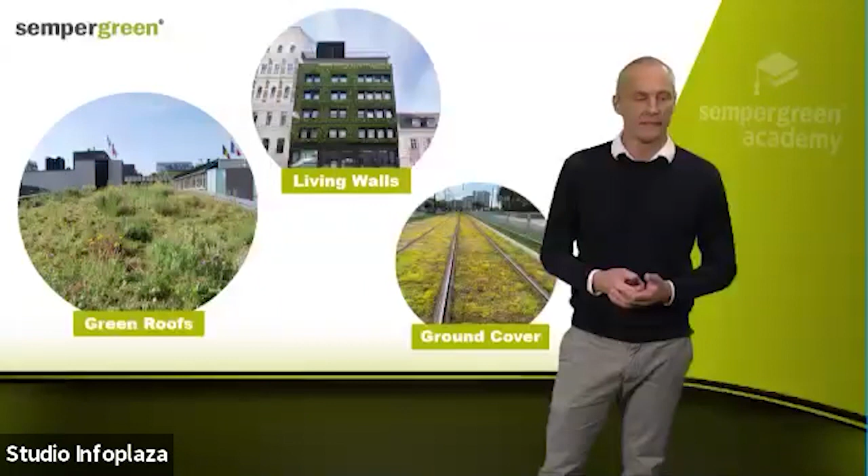It's our mission to create a greener and more livable world, and knowledge sharing plays a vital role in achieving that objective. The reason is that without information in the right place, we cannot move forward. So therefore, we've decided as a company to partner with experts to be able to share relevant content regarding green solutions and other topics through Sempergreen Academy.

One of these experts is Dr. Anna Zachrisson, and she is the Vice President of European Affairs for the Green Roof Diagnostics. She's a creative and award-winning scientist that translates difficult scientific information into understandable language, making the wonders of science available to everyone. It's her mission to inform and to communicate and to push projects forward based on solid data.

And this comes from a vision of a flourishing green industry that bases its claims on scientific data. In short, she is an independent consultant that always lets science have the last say.

But before we listen to what Anna and what science have to say about urban flood prevention, first, Roosmarijn Knol, who is a meteorologist at our host InfoPlaza, will tell us all we need to know about the causes of urban flooding. So sit back, relax and enjoy, and I give the floor to Roosmarijn.

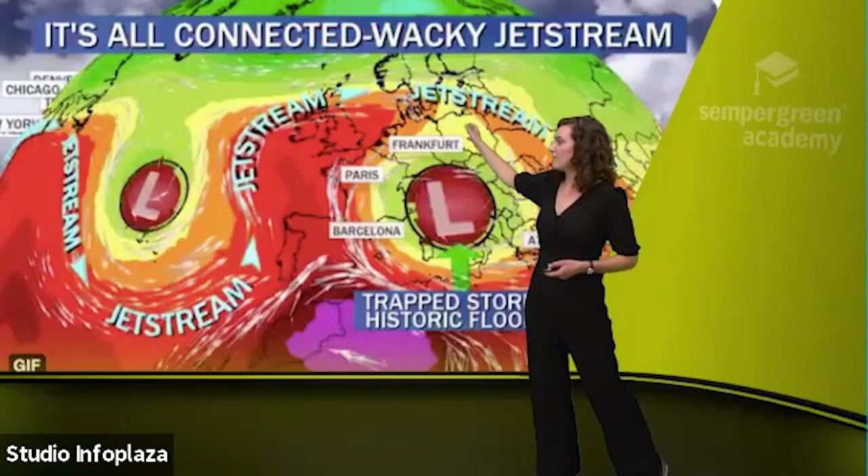Here we can see the jet stream. The jet stream is a meteorological phenomenon, and when the jet stream is a straight line, that means that the air and the wind at a higher altitude is flowing in a more or less straight conveyor belt from west to east. But when the jet stream becomes disrupted, as we can see over here, when it gets a wavy pattern, that means that weather systems can become trapped in between the curvature of the jet stream. And that is what happened over here.

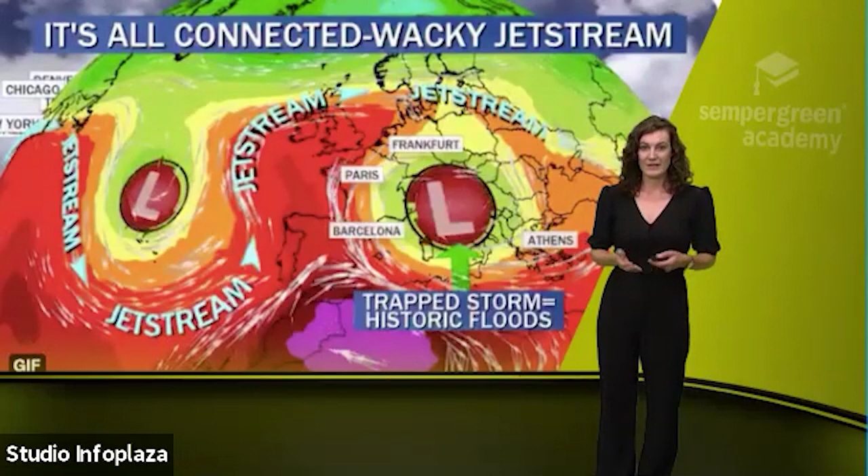We can see a low pressure system, a depression with showers and rain trapped in between the curvature of the jet stream. And that means that the showers remain at the same place for a long amount of time. And that means that those showers can produce extreme amounts of rainfall. And that was the case for the floods in Germany, Belgium, and the Netherlands.

So here I have a map of the rainfall amounts. It was spread over 2 days. We can see here the 13th of July and the 14th of July. And this map shows the colors and the rainfall that was measured during those days. So we can see the blue, purple, and red colors. So in one day, the maximum amount of precipitation was 150 millimeters.

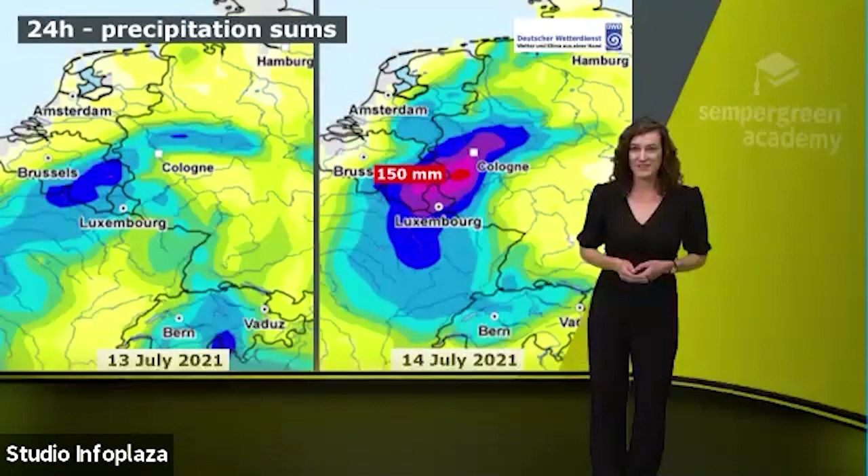But when we add those 2 days together, you can see that the total amount of precipitation in this area, a huge part, added up to almost 200 millimeters. So that is an extreme amount of precipitation, and our current infrastructure is not ready to deal with these amounts of precipitation, and that leads to severe flooding.

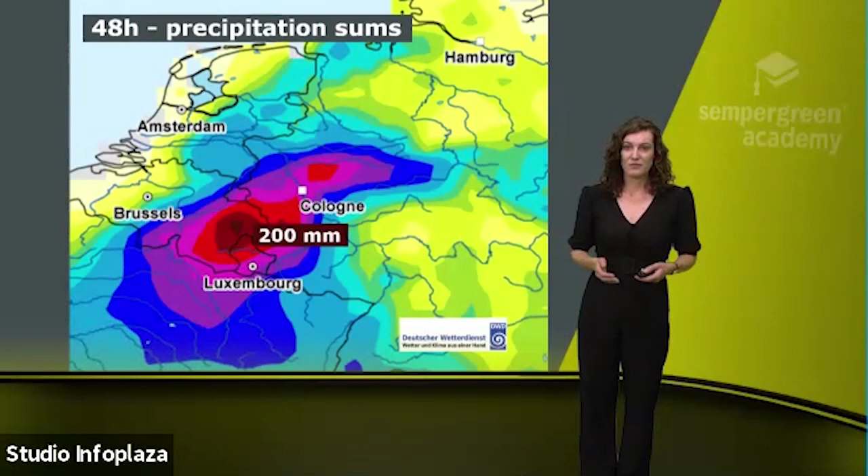So this was an event, a very rare event that happens once every 400 years. But science has shown that these types of extreme events are more likely to happen in the future. And in summer, it is up to 9 times more likely that such an event will occur. And as we saw in the previous slide, the extreme amount of precipitation, so almost 200 millimeters, can even increase with another 3 to 19%. So we should prepare ourselves for more of these extreme events.

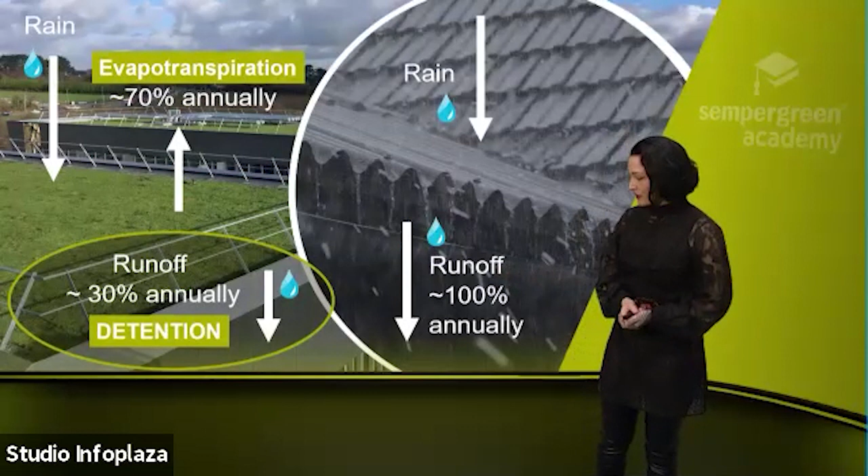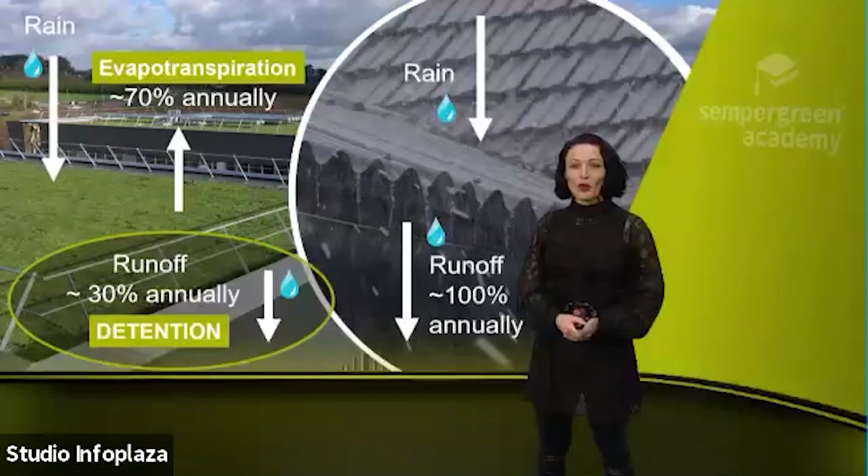So going up to the roof, when you have a bare roof, like you see here in this picture, approximately 100% of the precipitation will run off the roof annually and basically become runoff. And this, of course, if it's a big storm, it will fill up the sewers. It can lead to so-called combined sewer overflows. That basically is an overflow of the combined sewers that take in both the sewage that comes from your toilet mixed with any water that comes from rainfall, basically.

So these sewer systems are often underdimensioned in the Western world and can lead to an overflow. And in order for us to not have our toilets overflowing in our houses, there are so-called combined sewer overflow points, often located in the nearest water body. So now, as I sometimes say in Berlin, if it smells like poo when it's raining, it is poo, sadly. So this is something we would like to absolutely remove. This is not something we'd like.

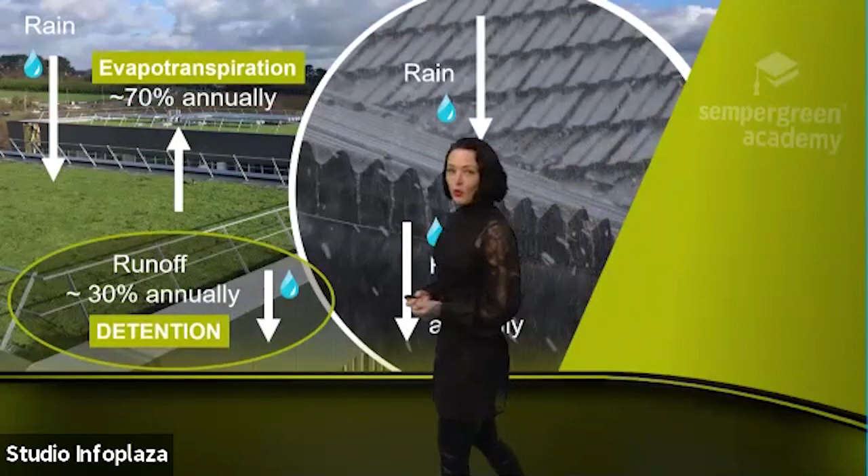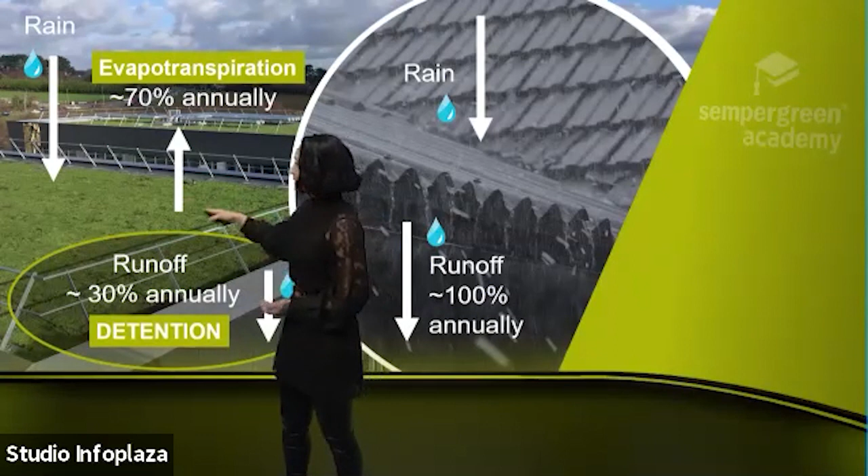So the other process here on a green roof, you can see that you have 100% of the water coming down in precipitation, but around 70% of the water is evapotranspired annually if you have a high retention type green roof, mostly containing also needle mineral wool. But we still have this 30% annually in this particular case that will become runoff.

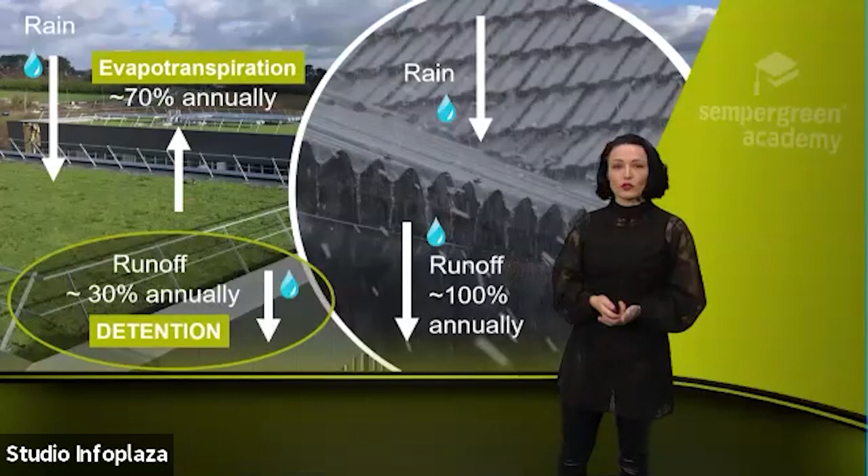Now, this is the water that is coming from large storms and from repeat storms, and these are the storms that cause the most problems and can lead to combined sewer overflows. So this has been a little bit what we've been most focused on: seeing how we can handle that water that becomes runoff.

So to just present our lab a little bit, that we of course are very proud of, the Green Roof Hydrology Lab, the main lab is located in Virginia in the US. And we have a fantastic team there that I love working with. And we have this rain lab here. It's a rain simulator where we can basically simulate different storms, intensity, duration, and so on.

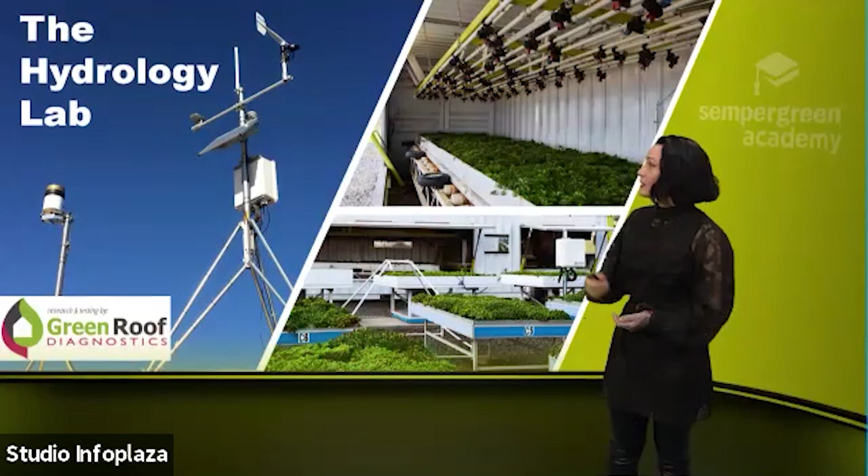Then we have these outdoor platforms. The platforms are on lysimeters so that we weigh every single water drop going in and out so that we can create models and make predictions of how a system would work and so on. So this is also our weather station over here that basically provides us with a lot of weather data.

So we conduct physical modeling, SWMM modeling, and we also have several online tools developed that you can use free of charge online. So if you're interested in any of that, just go to the Green Roof Diagnostics website and check it out.

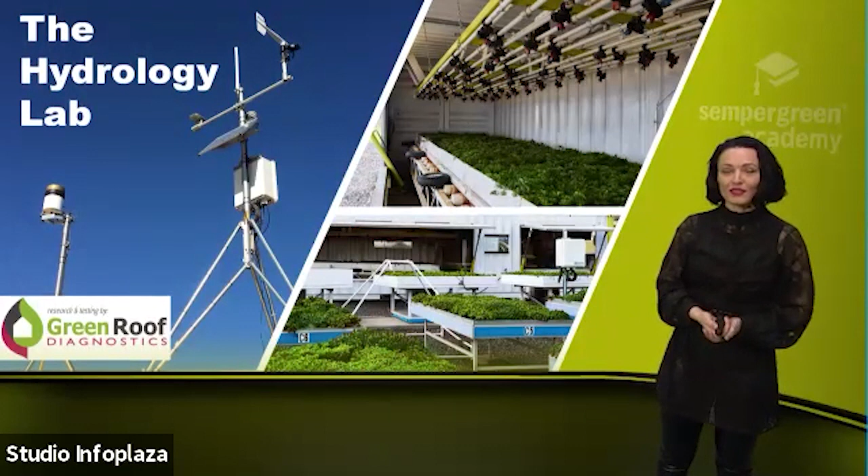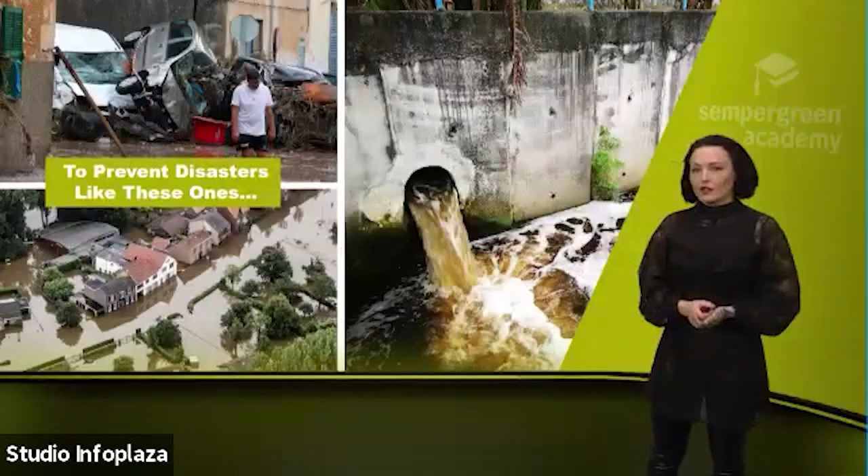So one of our main research questions has been, how do green roofs handle large storms? We're talking about these massive large storms that cause flooding, devastation, and combined sewer overflows. There wasn't a lot of research done on this, which is why we thought it was very, very interesting to take a look at.

So I already spoke a little bit about the combined sewer overflows. Here we see a combined sewer outflow point where basically the blended sewage is released straight into a water body. As an aquatic ecologist, it's been my job for several years to actually sample these points and see what the nutrient loads are, etc. So I've come from the other side previously in my career.

But not only combined sewer overflows and the ecological and economic damage they create, there are also these disasters happening that we need to find novel and sensible ways to deal with. And of course, no single method would be the magic bullet that fixes all, but we need to look at what type of innovation is available and start a sensible transformation to a truly sustainable society. And that means including all three pillars of sustainability: economy, society, and ecology. It has to make sense from all three perspectives for a solution to be valid.

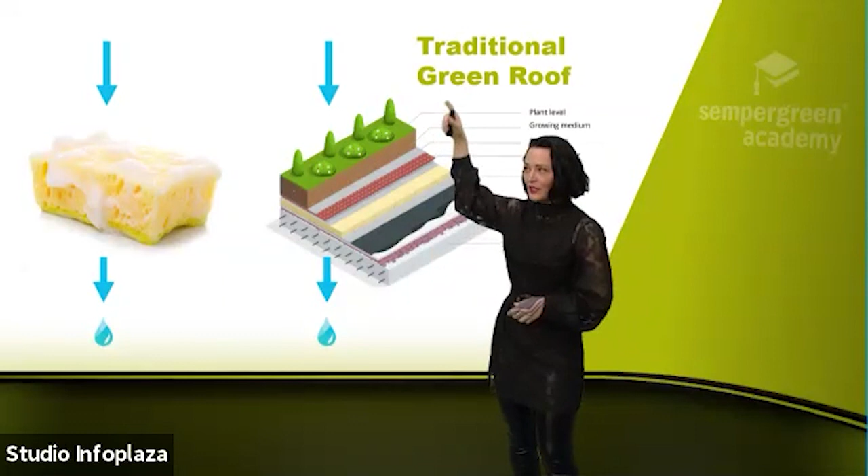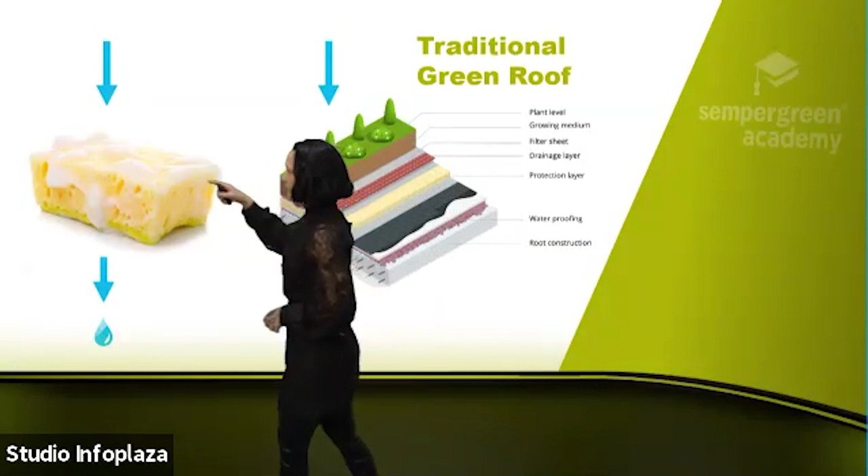Well, we found that a green roof tends to work like a sponge. For a traditional standard green roof that has no detention capacity, i.e. most of the roofs on the market right now, it's basically like in your bath: you have a wet bath sponge and you put water on it, it almost immediately flows out. It becomes a pipeline through the sponge. One drop in becomes one drop out.

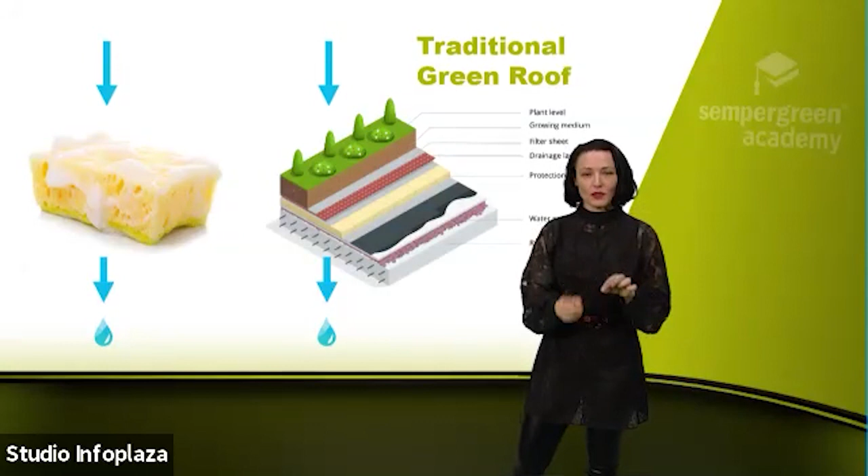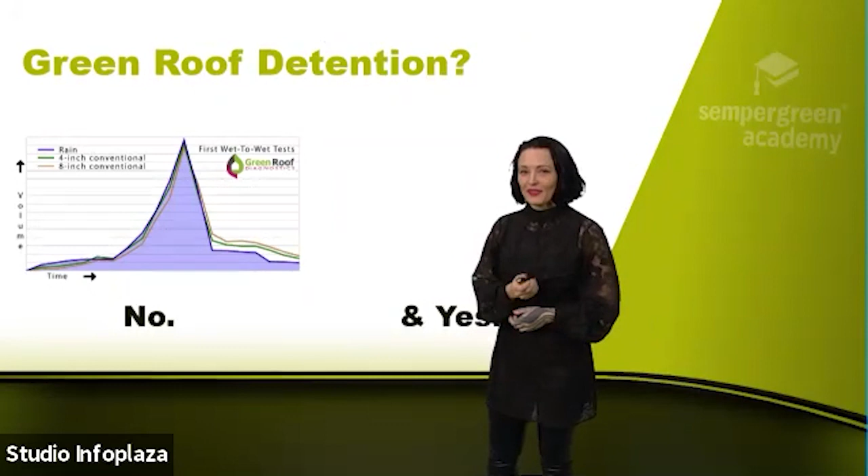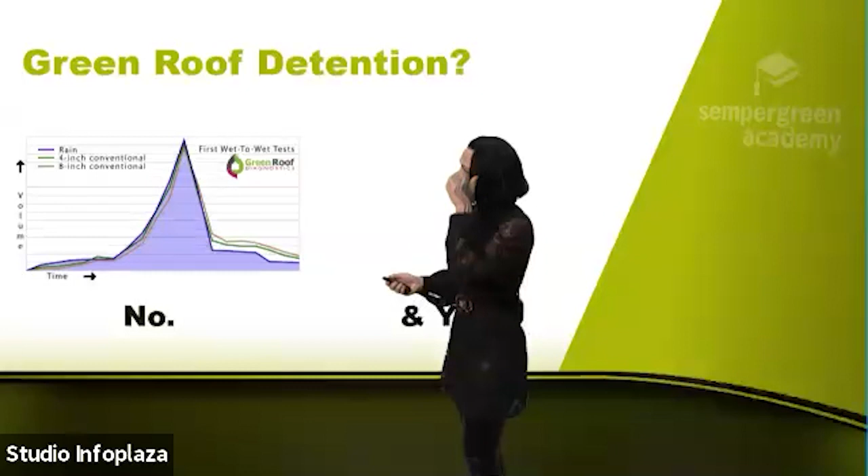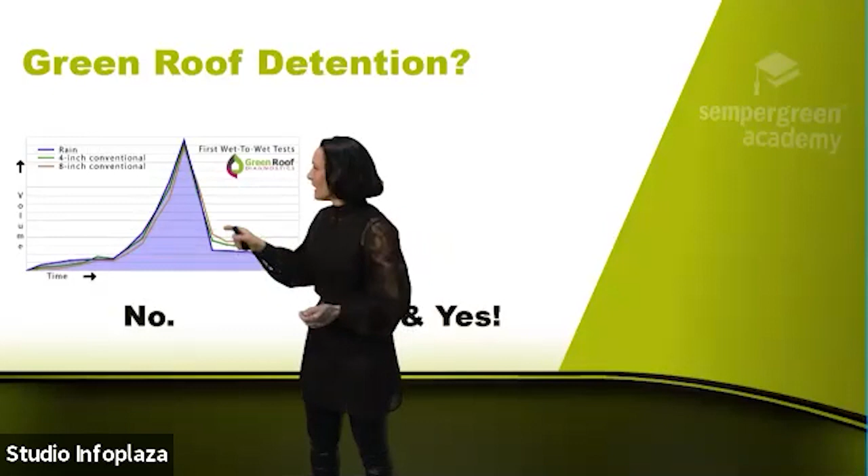So in order to visualize this a little bit further, we were very interested in looking at this properly in the lab, and we have conducted over 2,000 tests on this now in the RAIN lab and also on full-scale roofs. Here we see a graph where the blue line is the precipitation. Then we checked the runoff from a 4-inch conventional traditional green roof, and we saw basically no significant delay. You can see that there is a small delay here. We started out with the soaked roof. That's very important, the soaked roofs.

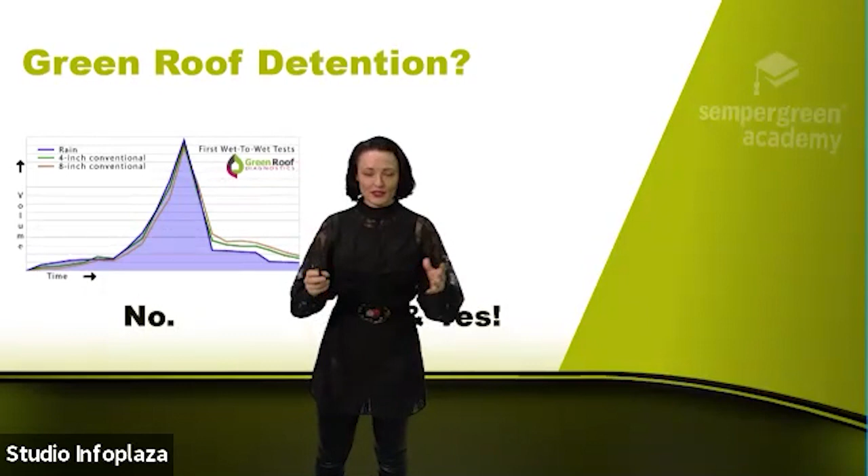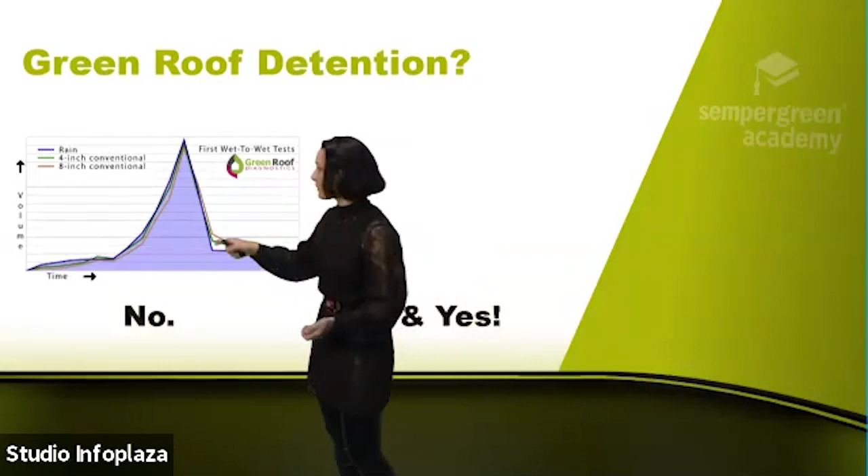And with this small delay here, technically I could say we could show that there is detention capacity, but let's rephrase this. In the catastrophic events that happened here in Germany and in the Netherlands over the past months, what would a 3-minute peak outflow delay really have done? A delay of a few minutes, in real world scenarios, matters very little. We need to delay water by a lot more, and we need to reduce the peak as well. We see no peak reduction here. We just see a tiny delay.

Then we had a lot of people telling us that we just need a thicker profile, because then you'll see detention, a delay in the system, basically an outflow delay. So we tested an 8-inch system here, 20 centimeters. And here too, we found an insignificant outflow delay from the green roof. But we didn't give up. We were very interested to see what we could do with this.

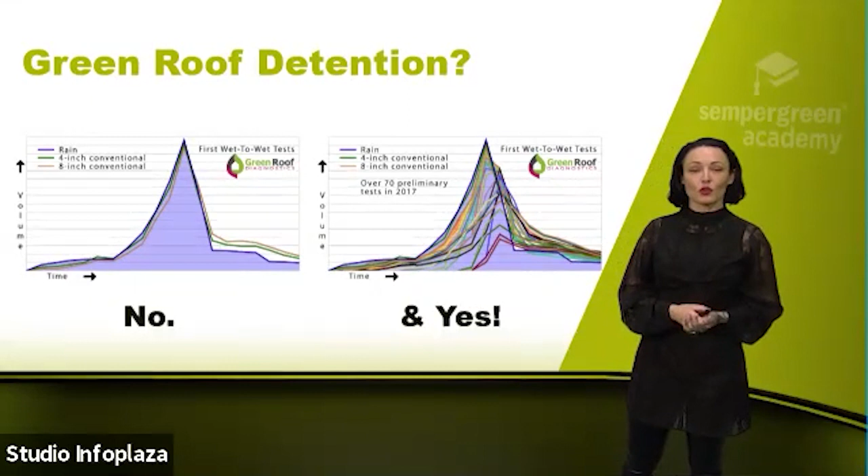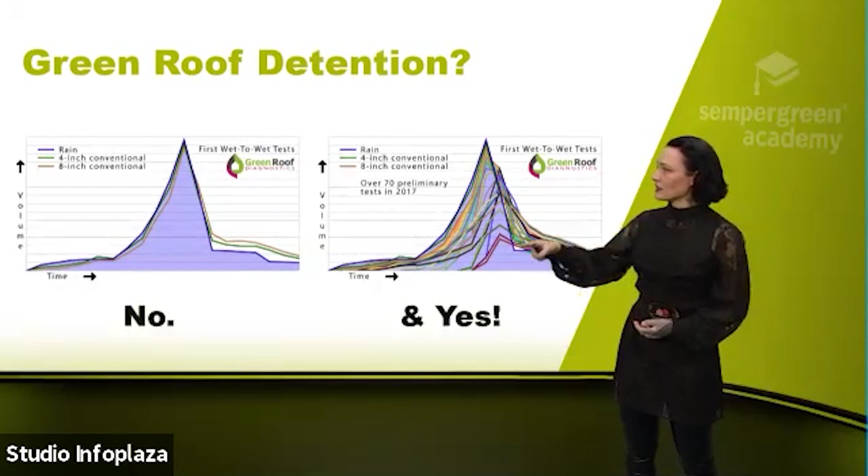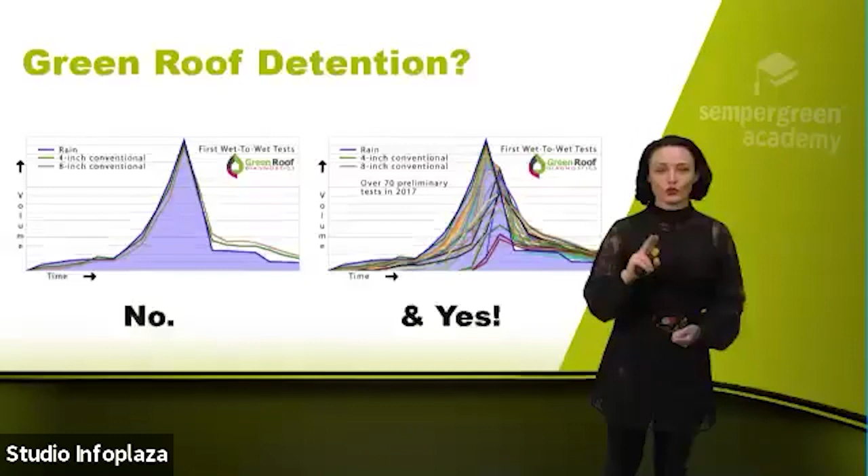So we started testing many different types of textile layers underneath the green roof profile to see if we could generate an outflow delay, a detention effect. This is from 2017. We tested over 70 different textiles here. And you can see that we found several textiles that showed promise, with both a peak outflow reduction and a peak outflow delay, which are the two key things we are looking for in a proper stormwater management tool.

So, is the green roof detention? No and yes. It depends on what type of green roof you're looking at. There are green roofs with detention capacity on the market.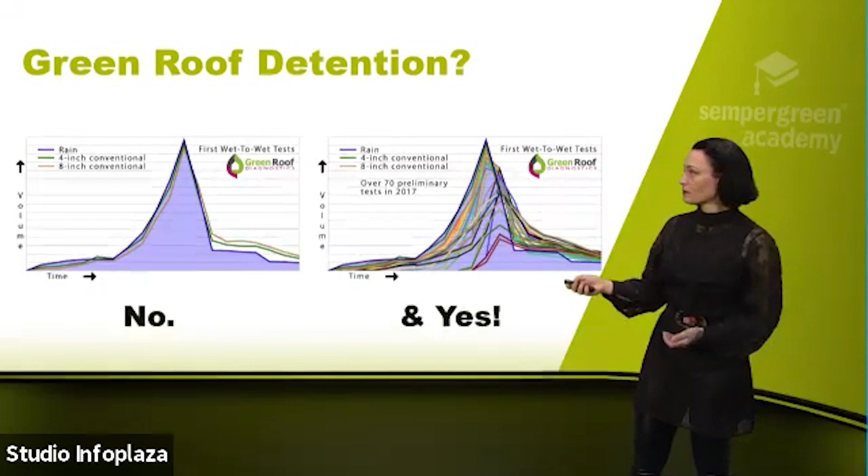So one of these concepts on the market is the purple roof concept, that basically became the concept that we had researched with the studies that started in 2017. And here is the textile that eventually ended up being the most efficient for this purpose. It is a detention layer, we call it detention textile, manufactured by a German company called Brovatec.

What happens in this layer: it's a polyester layer with many small threads. All of these threads basically generate friction. So as the water is flowing through the detention layer, the friction generates turbulence. And the higher the head pressure, the higher the turbulence. Meaning the more it rains and the more the water rises in the profile, the slower it will flow out. We have now tested this many thousand times.

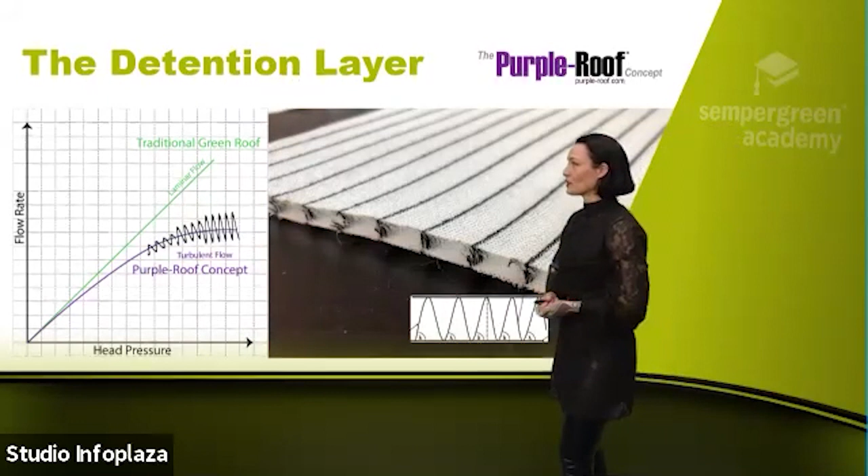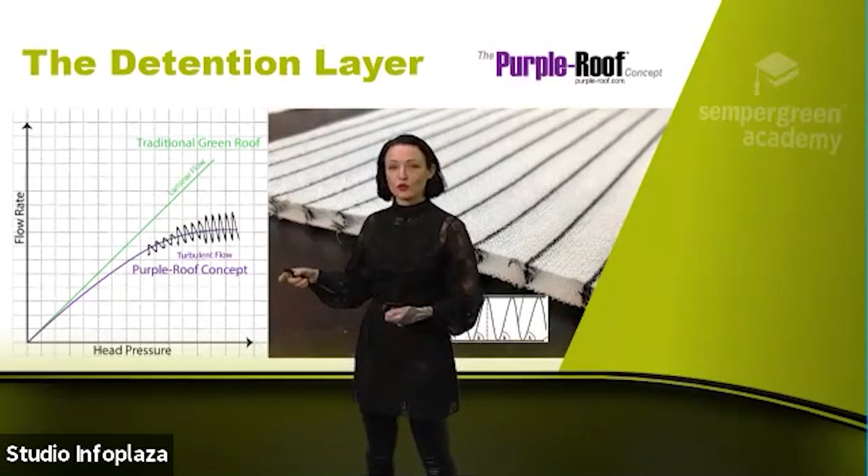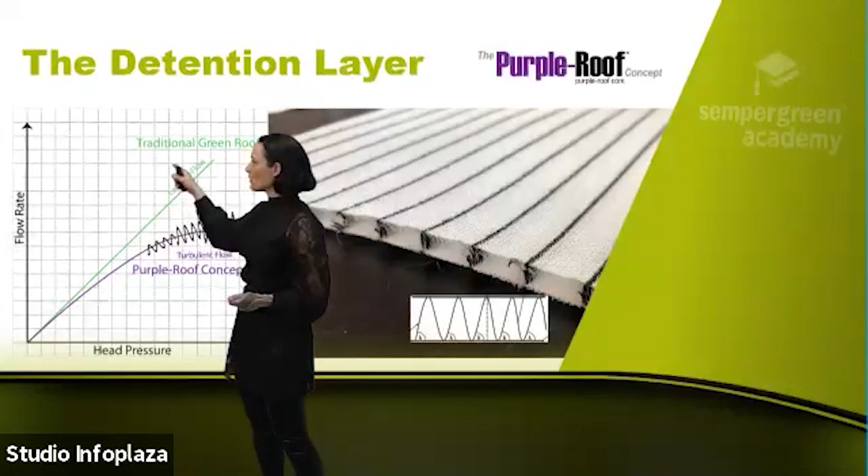And we have modeled it, both physically, and our hydrologists have also adapted the already existing green roof SWMM module for this. This little diagram here shows flow rate against head pressure. For a traditional green roof, you can see there's virtually laminar flow as it flows out.

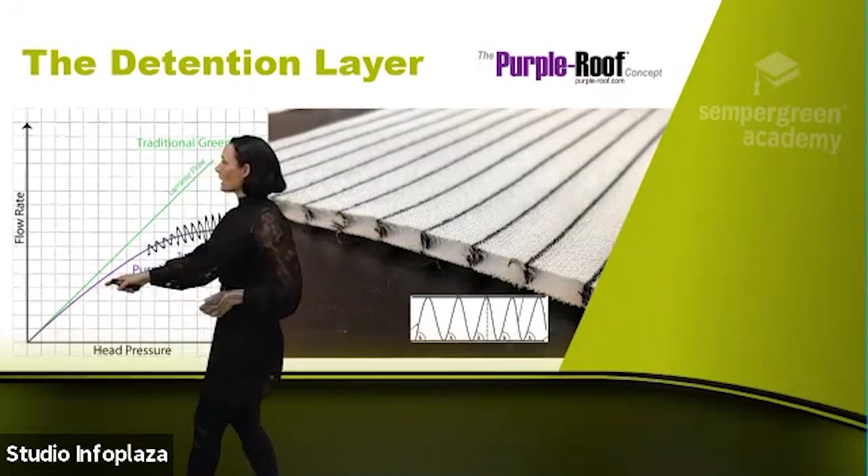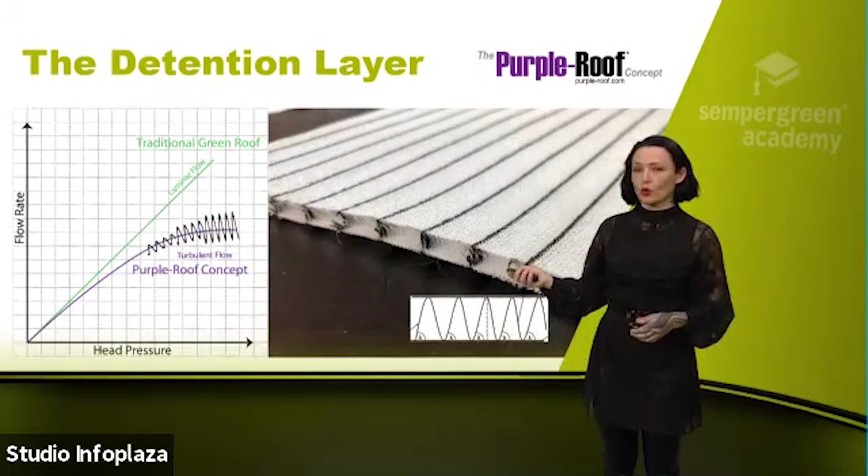But for this system, it starts when it's very low with rather laminar flow, but then as the head pressure increases, the turbulence starts to increase. And as the turbulence increases, the water rises into the profile. And then you have a slow and predictable outflow.

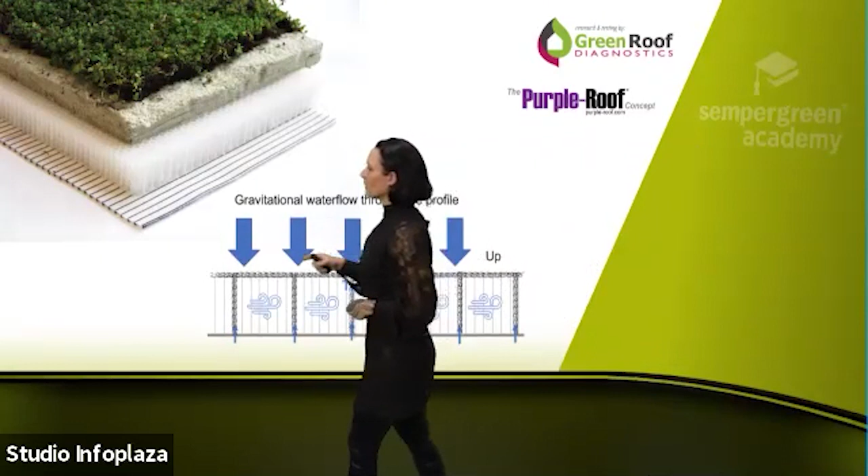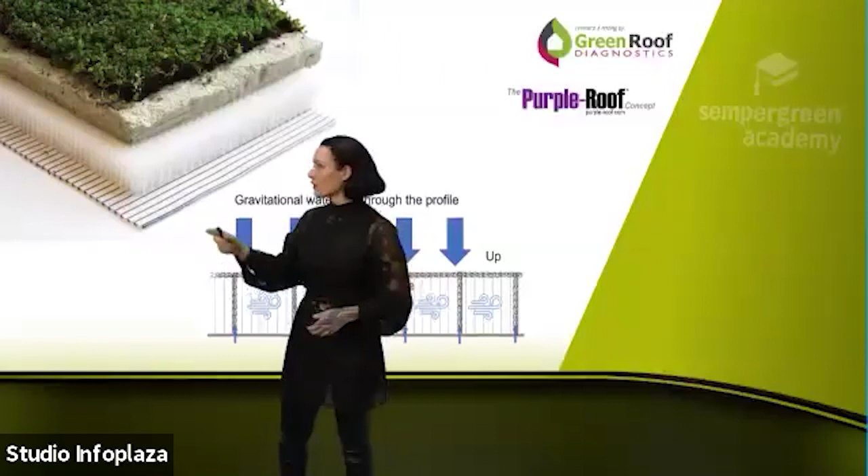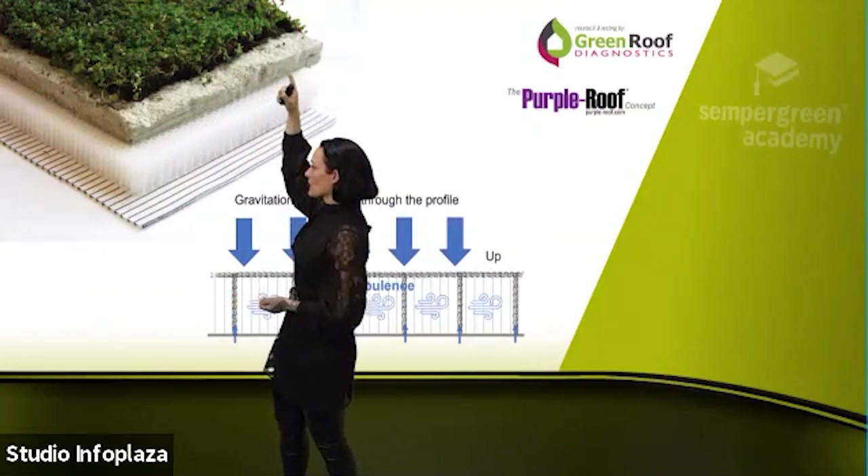So here you can see what the profile looks like. First is the detention layer down here. Then we have a honeycomb reservoir. This honeycomb shape basically means that there is no lateral flow of water between these cells, and the result is that the system can be used for sloped roofs as well. Above here, we have a needle mineral wool, and then there is a vegetation layer.

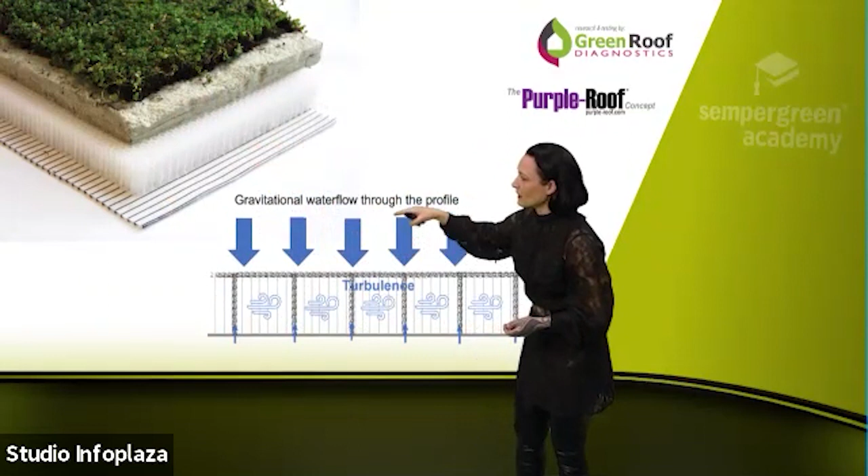So you have the gravitational water flowing through the profile, entering the detention layer, turbulence is created, and as the head pressure increases, it slowly backs up into this honeycomb reservoir. There's another thing with this detention textile that is very interesting. You can see here the black lines and the little arrows.

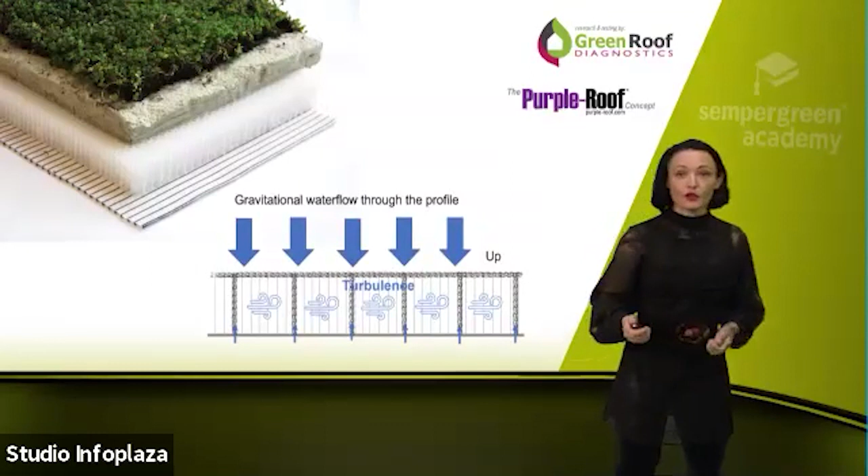As the detention layer empties out, if there is a little bit of water left on the roof membrane, it's basically sucked up passively from underneath the drainage layer into the profile, and then released as runoff or evapotranspired. So with this system, you'll actually end up having a very dry roof underneath the green roof as well.

So it's important to know the different types of detention concepts that you can have on your roof. The purple roof concept is what I've been discussing, because that's where our research has been centered. It's a very lightweight concept, and you can use it also on sloped roofs. But there are also other concepts, and blue-green concepts are also wonderful, in my opinion. These are often intensive roofs, so they're a lot heavier. They also require a completely flat deck.

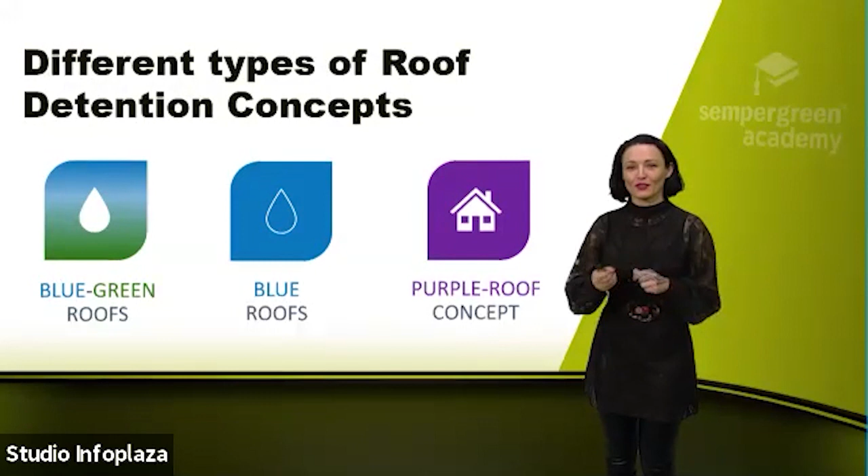But the very good thing about them is that you can have rainwater harvesting underneath the profile. So it's a very nice concept if you're building something, the load requirements allow it, and you have a completely flat deck. It's a very good solution. Blue roofs are basically the same as a green roof, they just don't include any plants, which means you're missing out on the retention capacity and the evapotranspiration capacity. Well, you have some evaporation, but not the transpiration.

One really important thing not to forget is: what is a green roof in the eyes of a stormwater engineer? How do stormwater engineers see green roofs, and what is the real world use case? So for stormwater management, the rules of the game: as a stormwater engineer, you need to make sure that the building you are responsible for is safeguarded against flooding, at least to a certain extent.

You might not plan a building for a 1,000-year storm event, but you often plan it to withstand a 100-year storm event. At least that's common here in Western Europe, with some exceptions. So the stormwater engineer often has to ensure that the stormwater tools on site stay within the maximum allowable outflow rates of often around 10 liters per second and hectare. Sometimes it's even required that every single drop of stormwater is dealt with on site. It really depends on the municipality.

So in order to do this, they will usually calculate based on a certain statistical storm, a so-called design storm. This design storm has a certain shape, a time factor, and also a depth, basically how many millimeters fall.

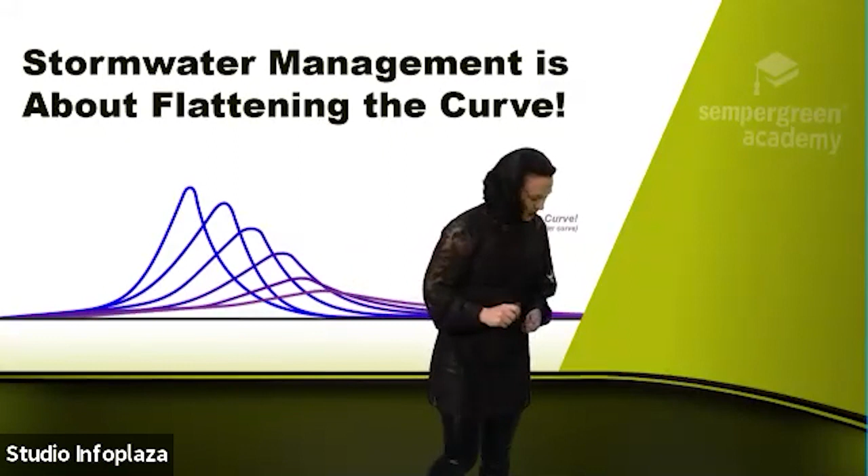So stormwater management is all about flattening the curve of the outflow. We have a peak flow reduction and also a peak flow delay. It's a little bit of what we learned during the horrible Corona times behind us. It's the same concept. We need to flatten the curve for stormwater.

So there are, of course, different types of storms. A storm is not just a storm, as if they're all the same. They are very, very, very different. So they can go from a small summer drizzle, to medium storm events here, to these absolutely catastrophic microbursts that will cause a lot of damage and destruction. And so we need to take a look at what green roofs can do for all of these.

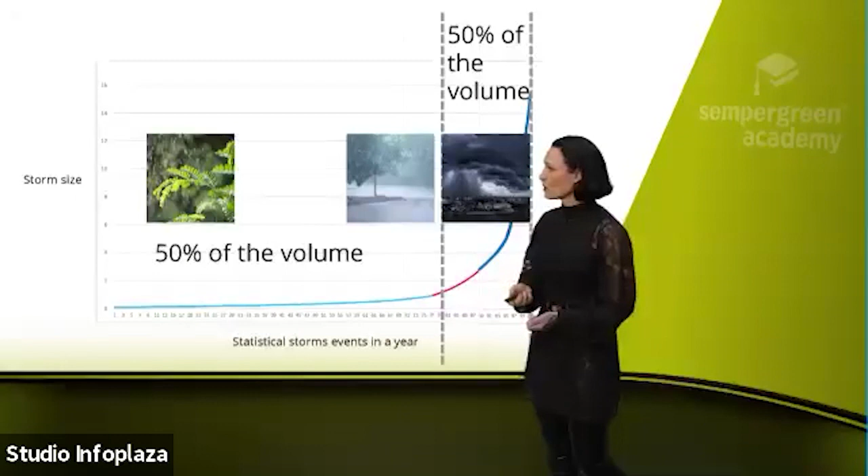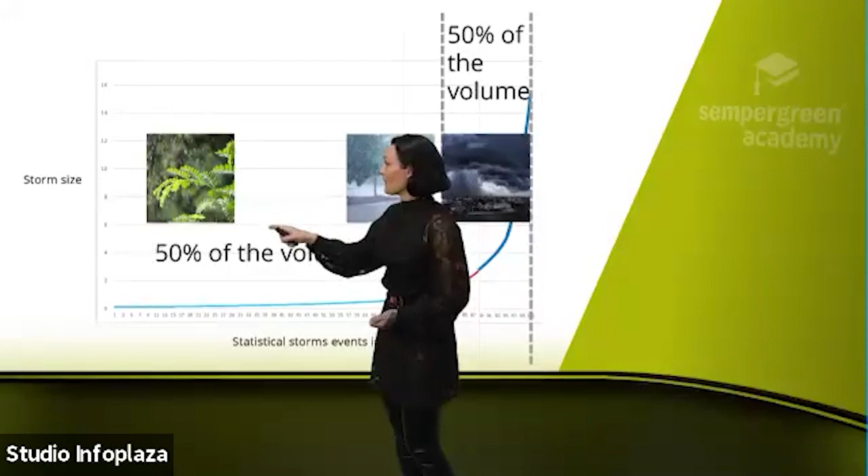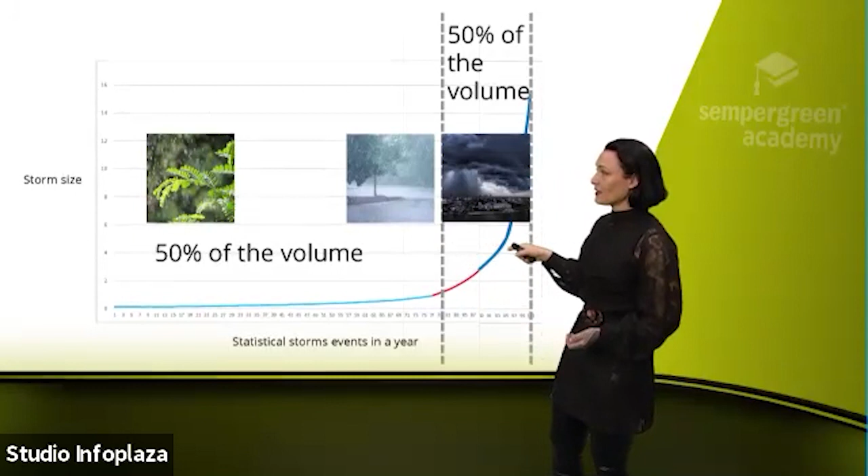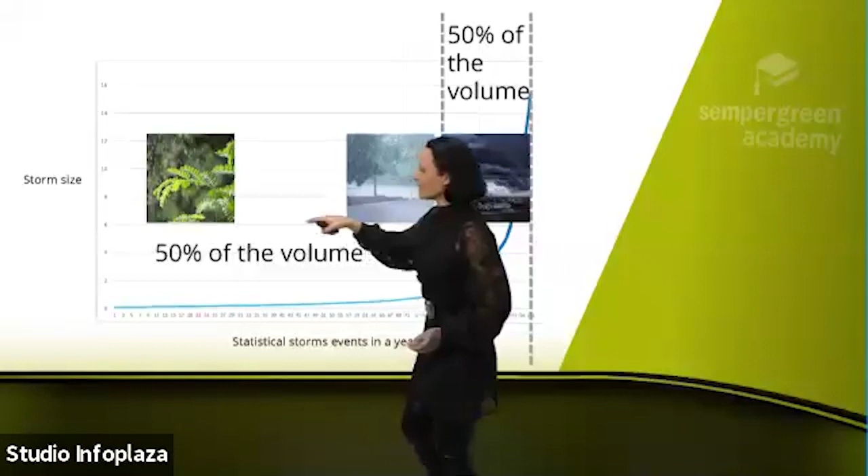So when it comes to these small summer drizzles here, they represent most of the events, of course. So about 50% of the annual volume is represented by about 80% of the events, whereas 20% of the events here represent 50% of the volume. So we have these massive downpours coming down here. So from maybe here to here, if the roof is dry, a normal standard retention type of green roof will do really well. The problem is when the outflow starts here, then we need to have the outflow delay that I previously also mentioned, the sticks and stones.

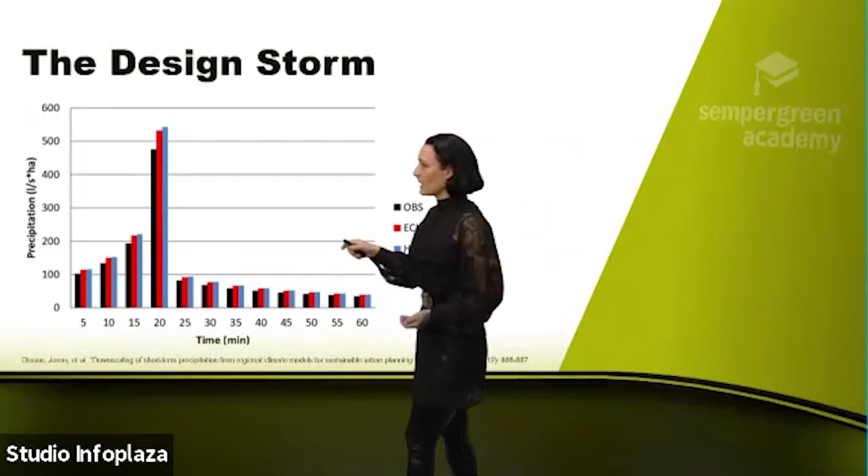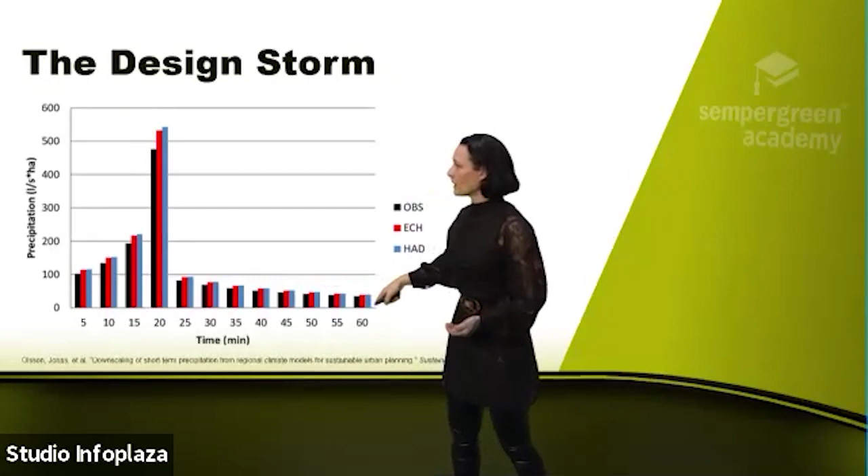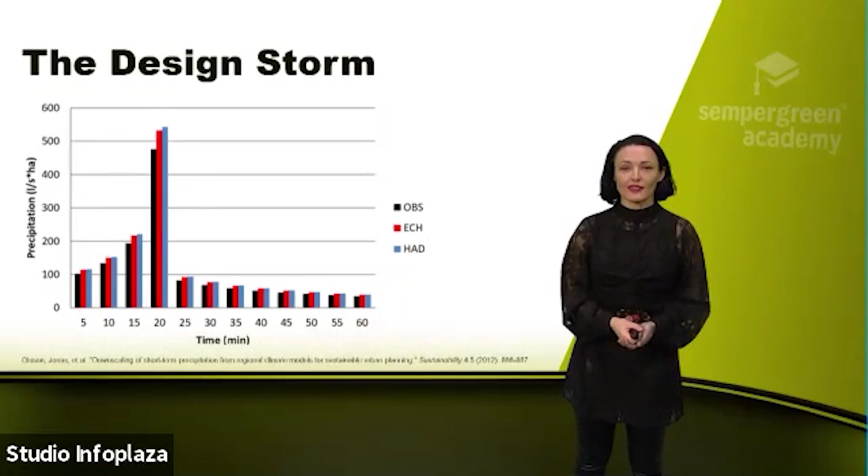So going back to how the purple roof concept is sized. Going back to the design storm that I just mentioned. This is probably a Euler type 2 storm, which is often used in Germany. It starts at medium intensity, going up to peak here, and then going down, and then slowly leveling off here. So that is basically the storm distribution that is used. Then in this case, it is over 60 minutes. And I believe in most cases for a 100-year storm in Germany, it's calculated between 50 and 55 millimeters, or liters per square meter. So you have all these factors to take into consideration when you size a stormwater tool.

So in order to help out with the sizing of the tools and to see if the outflow rates are met, because you need to meet the maximum allowable outflow rate. In this case, I have assumed 10 liters per second and hectare. This is one of the tools that we have online. It's on the Purple Roof website. It's the detention modeler. You can request a login for this and play around with it.

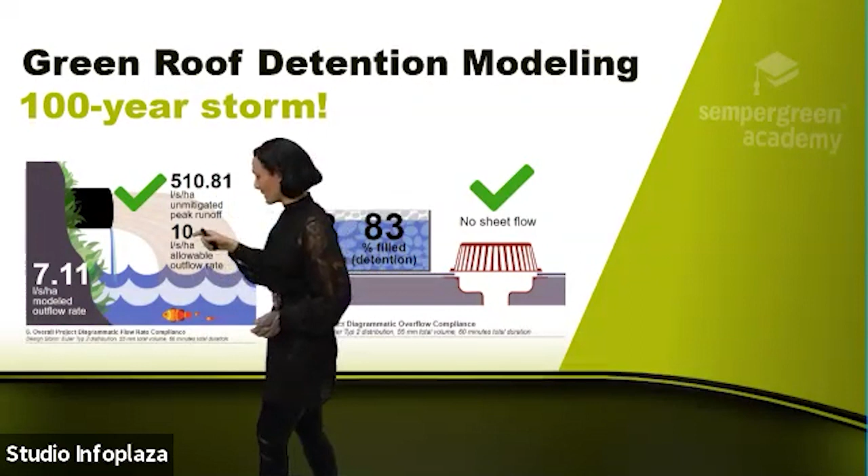This is a 100-year storm. If we had an unmitigated runoff, it would land at 510 or 511 liters per second and hectare. That means that if we had a bare roof or a saturated traditional green roof, this is the water that will come out at the peak flow, which is a substantial amount of water in a very short period of time. So with this particular Purple Roof concept configuration, I could get it down to 7 liters per second and hectare as outflow rate.

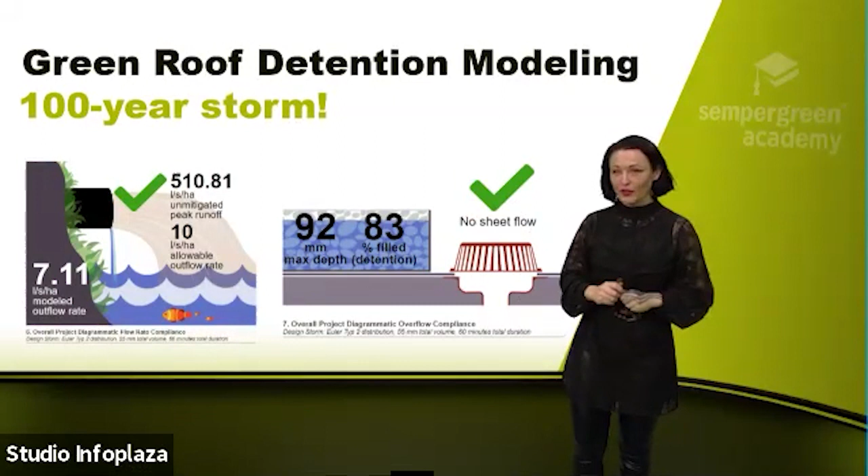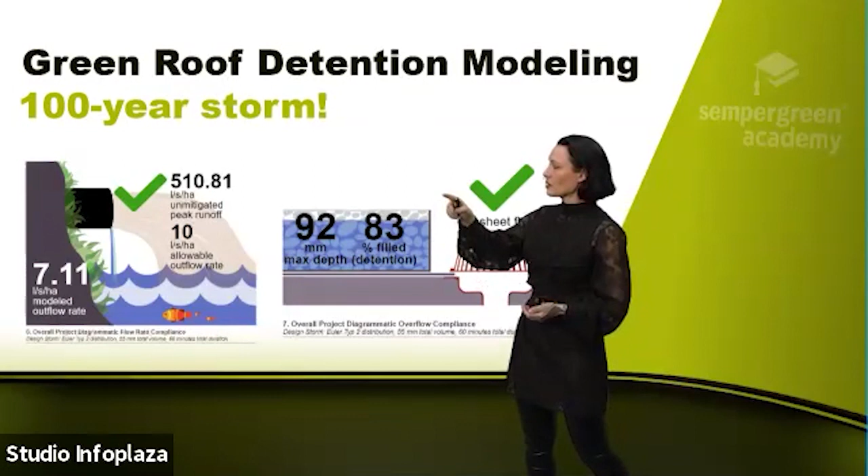Another very important aspect to take into consideration is sheet flow. So you need to make sure that you set up the configuration of the system so that you do not get sheet flow during the storm event you're modeling for. Because what is the use of having the water neatly go down and through the detention layer if all the water is running from above the profile, which is of course something we would want to avoid. So in this case, the model clearly says that there is no sheet flow, and it also gives you how big of a percentage of the detention capacity has been filled up.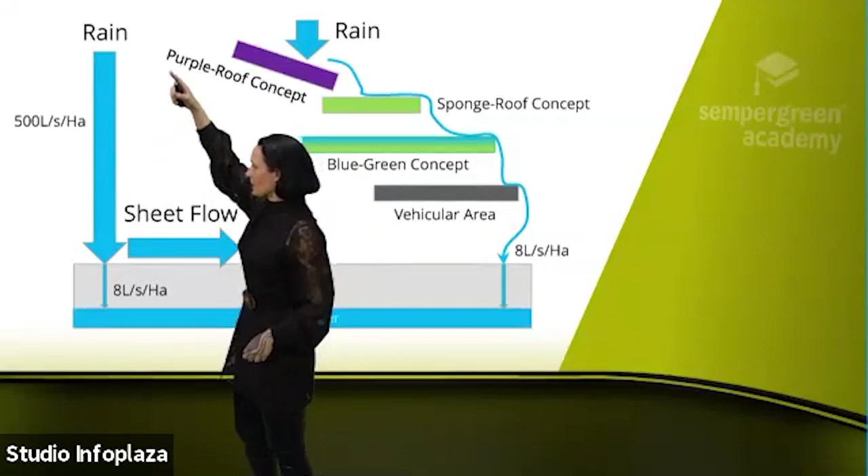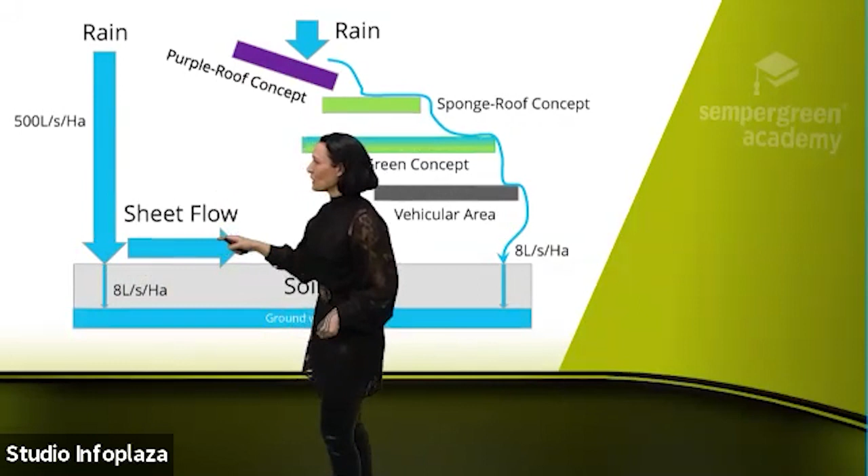And with our model, which we are continuously updating and developing, you can also create these treatment trains. So if we had rain coming down here, unmitigated, no treatment, just a bare roof, you'll find that a little bit will probably manage to percolate, maybe 8 liters per second and hectare. There's a lot of sheet flow that would flow all over the street and basically cause a lot of erosion and maybe economic damage, maybe health damage. And that's not what we want. And here's basically the groundwater.

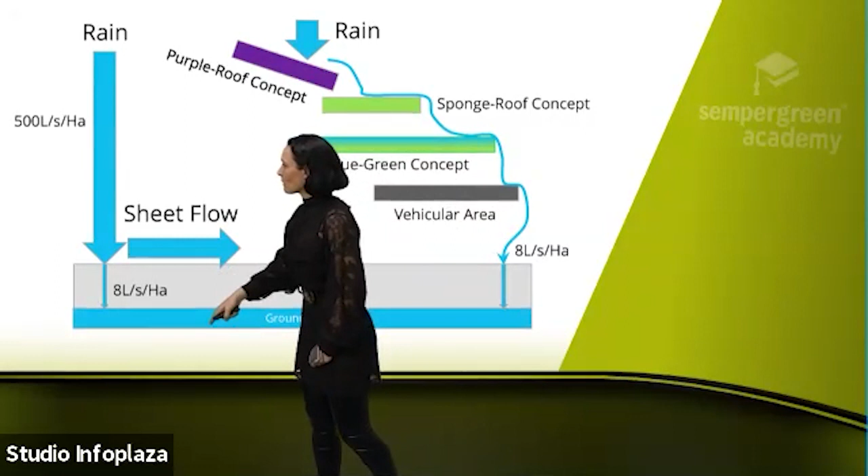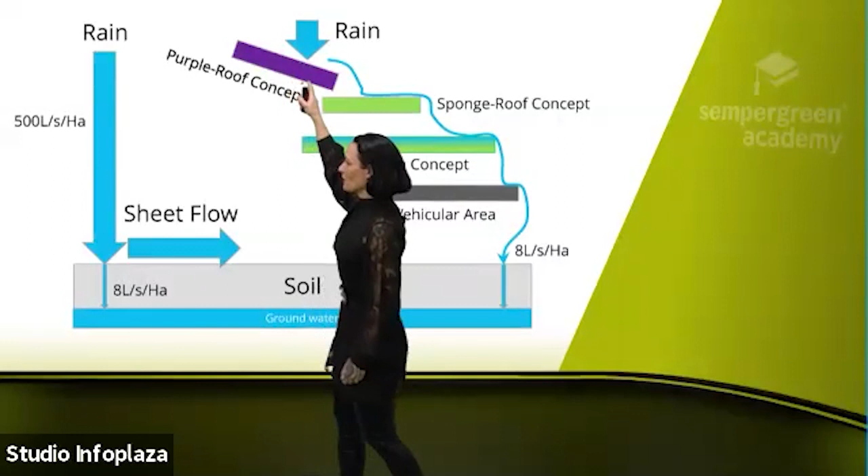So with this treatment train, I have taken as an example here, I've started with a Purple Roof concept here. It's a sloped roof here. The rain is coming down. The water is being slowed down here, and it ends up on a sponge roof concept on another roof.

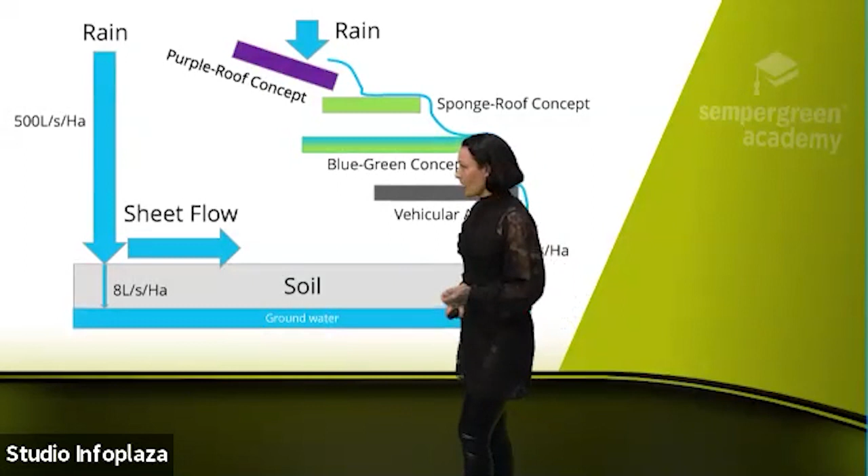So sponge roof concept is basically what we call a roof that has a high retention capacity, meaning they have included mineral wool. And it's very important to say also that it's non-toxic mineral wool. I would never, ever suggest that anybody uses any mineral wool that contains formaldehyde. There's a good solution from Knauf Urbanscape that has a needle mineral wool for these purposes.

So the water continues its path down here to a blue-green concept. And this is maybe where people are sitting having their lunch, chit-chatting and whatnot. And here some water can be stored as well for later use by these plants. Maybe there's a little bit of a garden here going on.

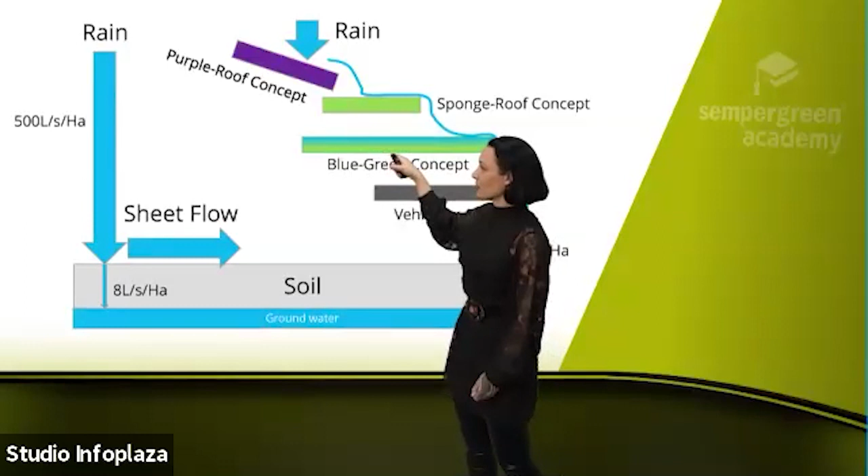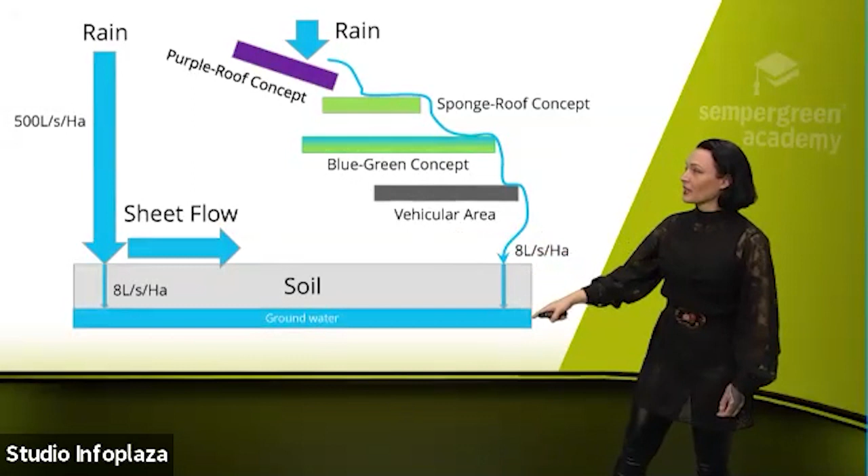The water then continues its path down to a vehicular area and then down to the ground. And maybe then we manage to model it and build it that way that the outflow rate coming down here meets the percolation rate, which basically means that the water is going exactly where it should be going, refilling the groundwater in a safe, predictable, and good way, I should say.

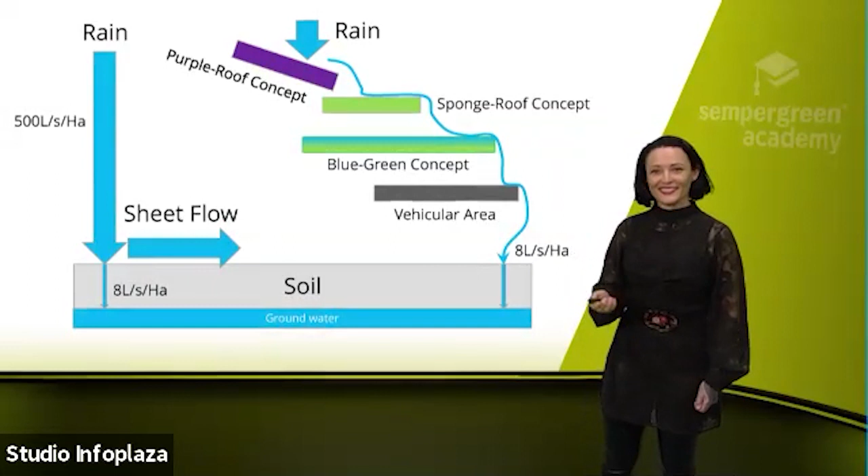So I mentioned in the beginning that it's very, very critical that we do not only think about the ecological side of this. We also must think about the economic and also the societal side. The ecological side is pretty obvious based on what I just have mentioned, and the societal benefits of this too. Now, the economics always plays into it.

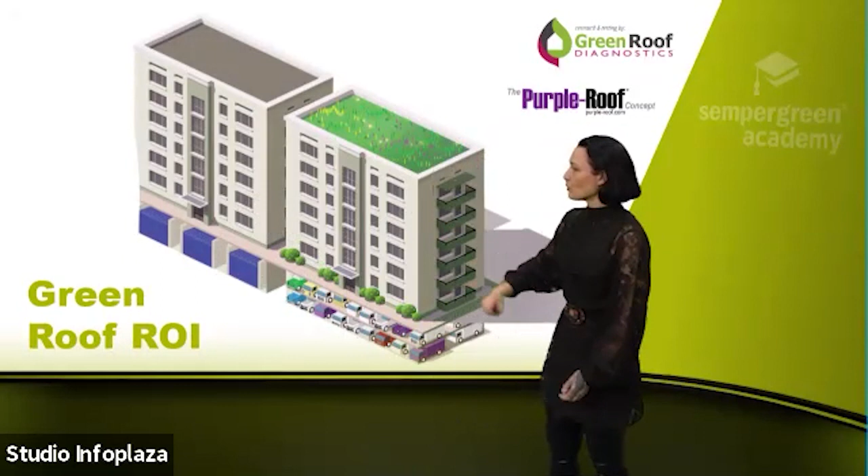But there's one thing with detention type green roofs that is really good when it comes to developing an ROI for the roof, because you can reduce a lot of other at-grade stormwater solutions and instead manage your stormwater fully here on the roof. You can often free up space that you can use for other kinds of development that creates an ROI for the roof.

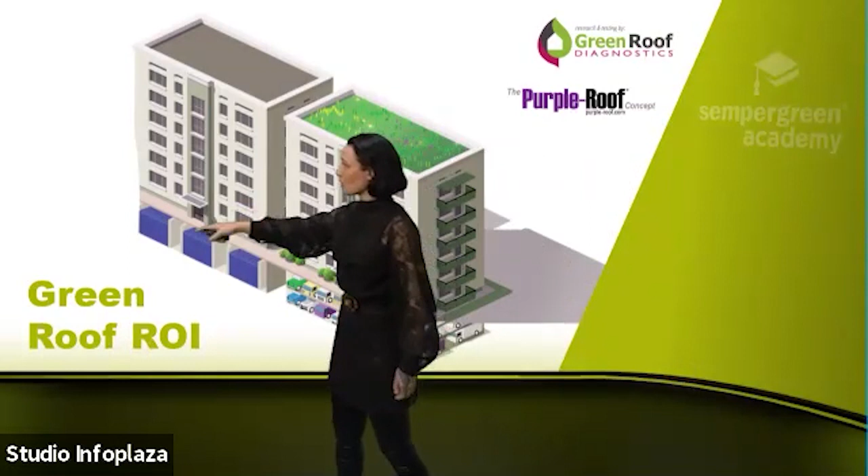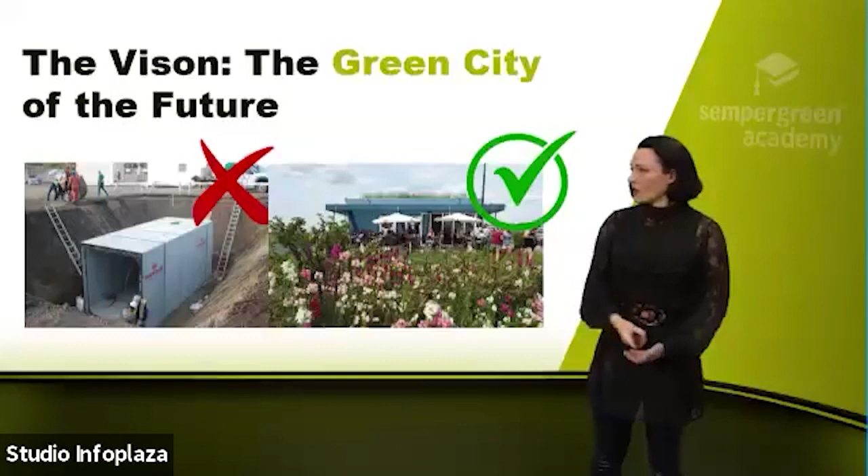So I'm using these tanks as an example because we have an example project in New York City where there's a lot of these tanks built underneath the buildings. And considering that New York City is as costly as it is, it's a pretty fast thing to actually pay for the detention type green roof. So our vision as a research institute is, of course, to get rid of this old, outdated concrete infrastructure that is used for stormwater and then replace it with green solutions.

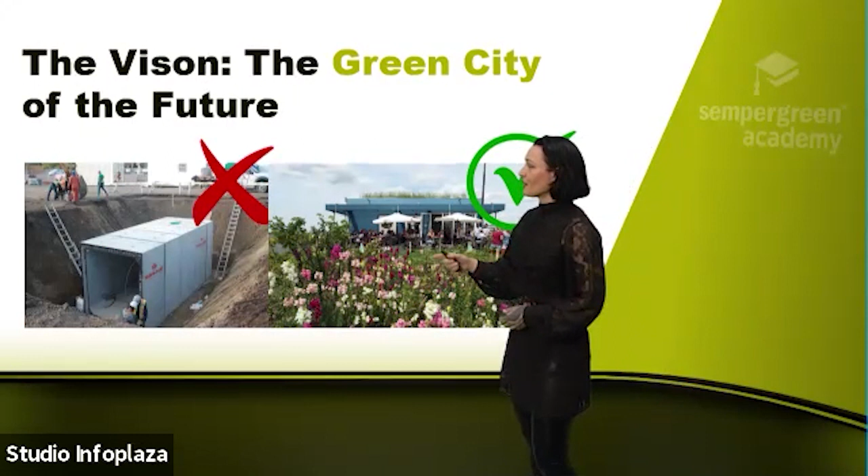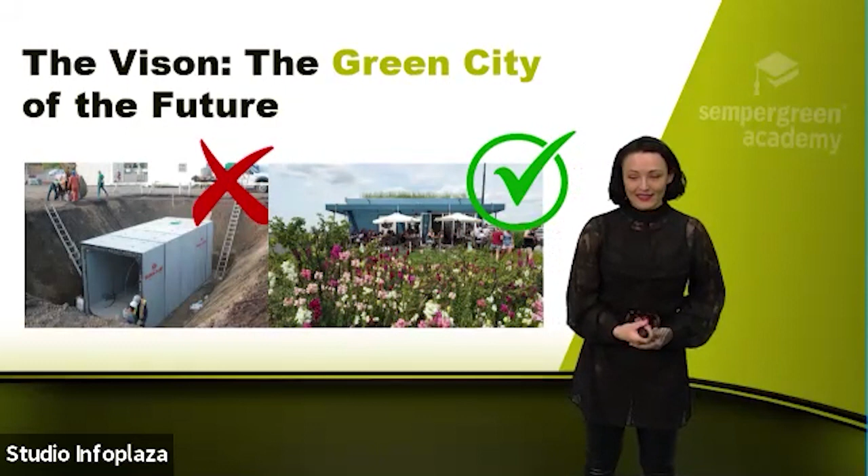So here's one really beautiful roof garden. I'm from Stockholm myself, so I've been to several fantastic roof gardens in Stockholm, and they make a lot of money as well because they have their pubs and the bars there, and you can sit and have a beautiful view over the city as well, while you see bees and butterflies buzzing around you.

So it's really beautiful. And I also want to be very clear that, of course, no solution is a magic bullet. There are fantastic at-grade solutions that are green stormwater management that should be seen as a treatment train connected to each other and not as competitors to each other.